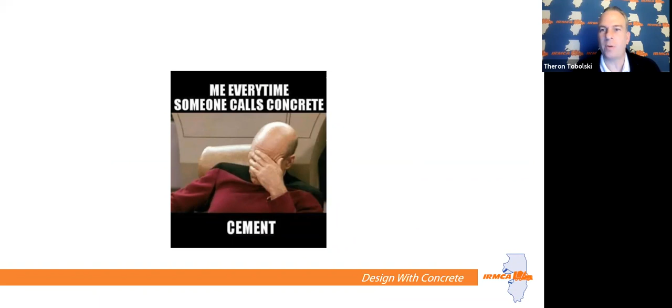So first things first, when we talk about concrete, if you're in the concrete industry, you kind of have to know the rules. How do you design concrete? How do you place concrete? What are the rules that the industry follows? We have ACI, the American Concrete Institute, ASTM, AASHTO, FHWA, and FAA. These agencies make the rules, standards, guidelines, and certifications for the industry so that concrete can be designed, produced, tested, and placed properly. As a concrete producer or engineer, you want to read them, learn them, preach them, and practice them. Those are the rules and guidelines on how we do concrete.

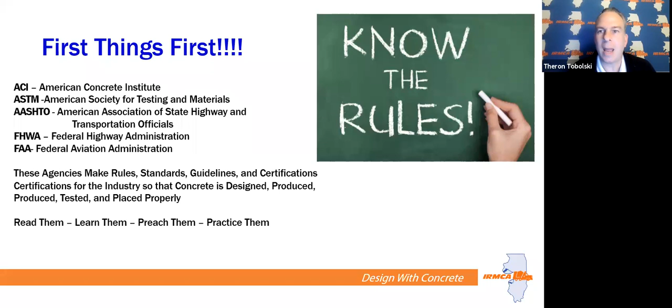Where do we supply it to? We have IDOT, municipal work, county work, Chicago Department of Transportation, the Tollway Authority, and airports. They take those industry standards, modify them, and then enforce their modified rules. They take what you typically do and edit it based on their knowledge or focuses, then ask the industry to follow their modified rules. But when you look at residential work, commercial work, industrial work, healthcare and schools, high-rise buildings, they basically follow those rules to a T. The specifiers specify ASTM, AASHTO, or ACI, and that's what you follow for those projects.

So what is concrete? Concrete is essentially a mixture of two ingredients, aggregate and paste. The paste is made up of all the cementitious materials such as Portland cement, fly ash, slag, Portland limestone cement, silica fume, and other materials. The paste binds the aggregate, forming what you end up with as concrete. The various components, as you'll learn today, can be adjusted in their weights and amounts in the mixes to make the concrete mixes act all different types of ways.

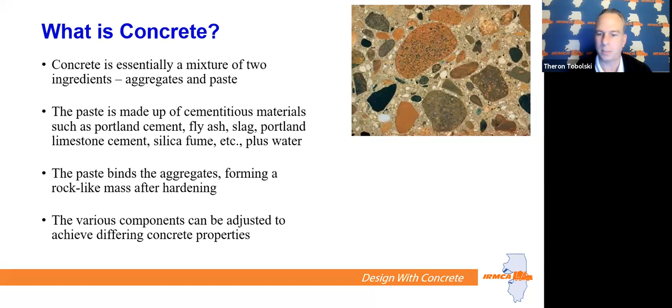A typical cubic yard of concrete contains 300 pounds of water, 564 pounds of cement, 1,200 pounds of sand, and 1,800 pounds of stone. That is what is in a typical cubic yard of concrete.

But concrete is actually a lot more complex. You can use type 1 or type 2 cement, or Portland limestone cement. You could add SCMs to your concrete mix, which is fly ash and slag, most commonly used in the Illinois market. There's air in there for freeze-thaw durability, and there's all kinds of admixtures you can add to your concrete mix that we'll cover in a bit. We're also going to have some amount of water in our concrete mix.

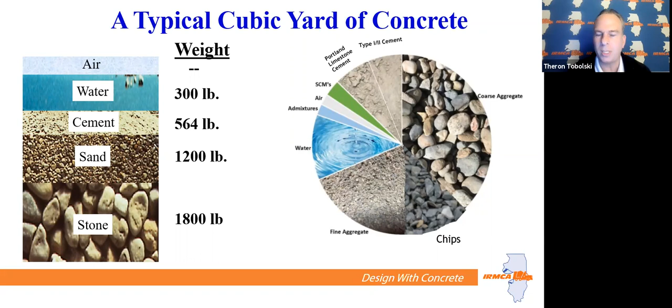A standard mix will have a fine aggregate like sand, and a coarse aggregate, 3/4 or 1 inch top size. But some mixes also have chips in them—you could have 3 aggregates. So depending on the concrete producer's complexity and how they like to make their mixes, it'll vary how all these different components are used in their concrete.

We're going to start with one of the basic ingredients, Portland cement. The governing rules for Portland cement would be ASTM C150 or AASHTO M85. What we mostly see in our market is type 1 normal use cement or type 2 moderate sulfate resistance. Most producers in their plants will carry those two types of cement, Portland type 1 or Portland type 2, or some are Portland type 1 type 2. That's the most common type of cement we see in our industry for concrete.

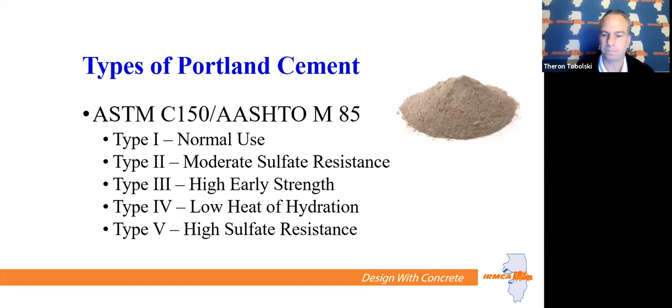But there are also various other types of cement. ASTM C595 blended hydraulic cements allow for slag, fly ash, Portland limestone cement, or ternary blended cements. So we take two different types of products and blend them together into a cementitious material that'll have a hydraulic reaction, and those are all covered under ASTM C595.

I'd like to talk a little bit about Portland limestone cement. This is kind of the new topic in the state of Illinois and the concrete industry in general. Concrete producers are looking to move to using Portland limestone cement that we just covered in the last slide. It has the same durability as the type 1, type 2 that we're currently using, and the same resilience. It has a 10% carbon footprint reduction, which is the other hot topic in the industry—carbon reduction of concrete.

So if you allow Portland limestone cement to be used on your project, you automatically get a 10% reduction in your carbon footprint. PLC gives specifiers, architects, engineers, producers, and designers a greener way to execute any structure, paving, or geotech project with virtually no modifications to a mix design or placing procedures. Again, it's very similar to the type 1, type 2 that you use and specify on a daily basis.

The Illinois Department of Transportation and the tollway both currently allow for Portland limestone cement in their specifications. If you go to www.greenercement.org, there's a whole host of information on Portland limestone cement.

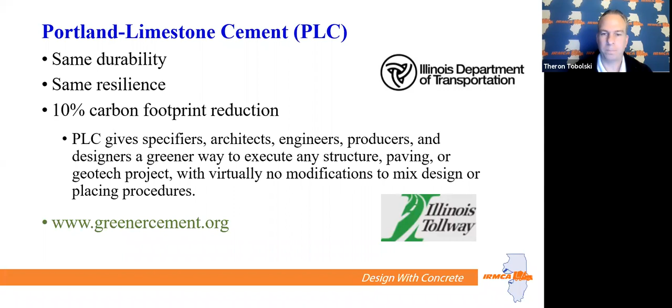How does Portland limestone cement differ from type 1, type 2? PLC is made by integrating regular clinker with up to 15% limestone, while the regular type 1, type 2 has 5% limestone. So the only major difference in Portland limestone cement versus the typical ASTM C150 type 1, type 2 cement is 10% more limestone added during the cement process.

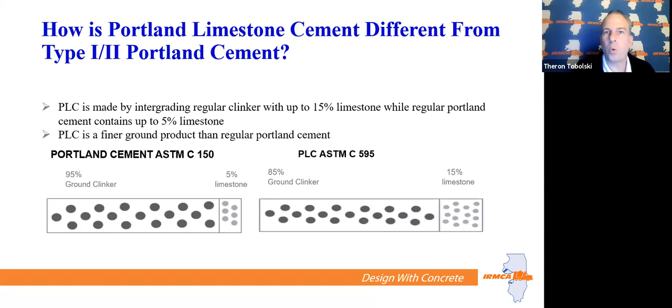This is just a quick diagram showing 95% ground clinker with 5% limestone versus 85% ground clinker with 15% limestone. As we covered earlier, this is kind of where the concrete industry is looking to go—to move towards Portland limestone cement, or at least to allow it on our projects.

Why are concrete producers still using type 1, type 2 cement instead of Portland limestone cement? There are three basic reasons why we haven't seen, at least in Illinois, that movement over to doing Portland limestone cement entirely: specifications, silo space, and availability.

So let's start with specifications. When we bid concrete projects, if the specifications do not allow for Portland limestone cement, we then cannot supply it on the concrete for those projects.

For a concrete producer, our cement is stored in a silo, which you see here on the slide. Concrete producers only have so many silos at their plant. So 95% of the concrete plants in Illinois cannot carry Portland type 1, type 2, and Portland limestone cement at their plants—they kind of have to pick one or the other.

So they're looking for the engineers who design work in Illinois to allow for Portland limestone cement as an option, so that they can start emptying those silos out with type 1, type 2 and moving to Portland limestone cement. And then it's kind of the chicken and the egg, which came first scenario. For cement companies, some of them can produce both type 1, type 2 and Portland limestone cement, some of them have to produce one or the other. So the concrete and cement industry need the specifications to be updated and changed to allow this movement to Portland limestone cement.

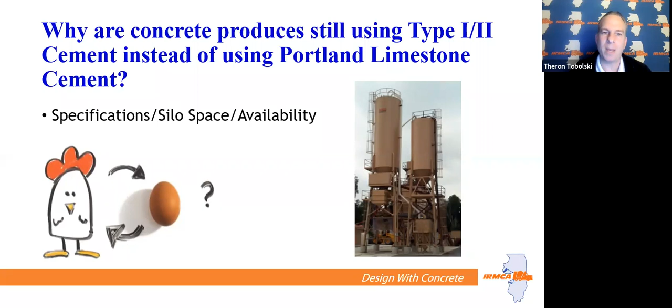Next topic we're going to cover is water cement ratio. This is one of the most important aspects in designing concrete and having durable concrete out in the world. The water cement ratio is the weight of the water in the concrete mix divided by the cementitious materials in the concrete mix. When we say cementitious materials, we mean the Portland limestone cement, the fly ash, the slag, or the type 1, type 2 cement. An example would be a mix that has 275 pounds of water divided by 564 pounds of cement, which would equal a 0.49 water cement ratio.

In a basic concrete mix, you need a minimum of 0.23 water cement ratio to get full hydration, and we'll cover what hydration is in a minute or two. Any excess water that you have in a concrete mix above the water cement ratio that mix was designed for will result in a weaker or more porous concrete. From a durability standpoint, every concrete mix is designed with a water cement ratio that allows that mix to meet the specification it was designed for and to be durable. Every gallon of water that you add to a concrete mix above the designed water cement ratio really dilutes the quality of concrete you're using on your project. It doesn't guarantee the concrete will be bad or fall apart, but it really increases the chances that it will every time you go above that water cement ratio.

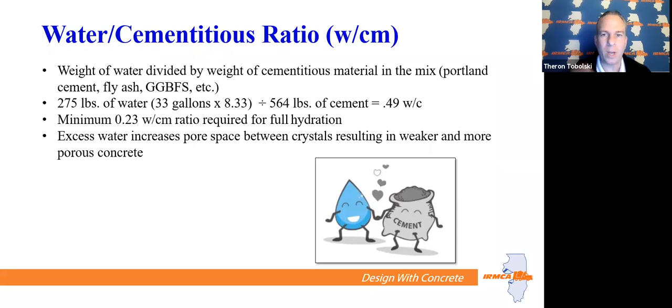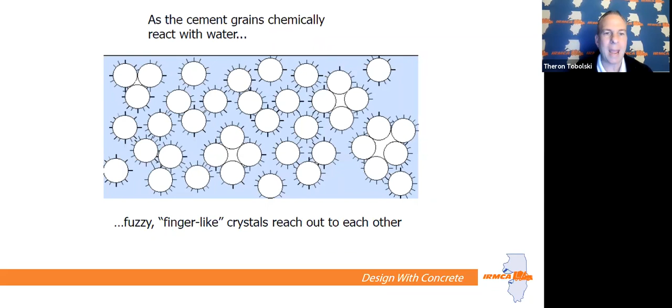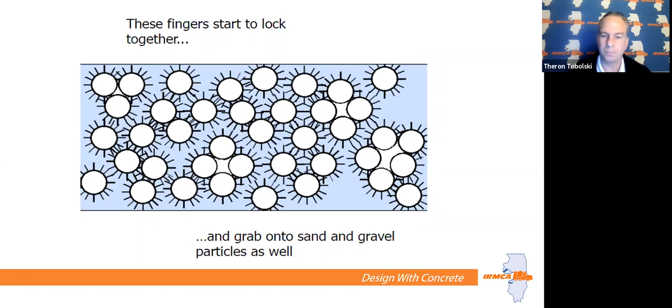We'll show you a little bit what hydration is. So we have our cement grains, these circles, and they're surrounded by water. As the cement grains chemically react with the water, fuzzy finger-like crystals reach out to each other. As you can see, that's starting to happen. These fingers start to interlock with other fingers of other cement grains, and they grab onto the sand and gravel particles that are in the concrete mix as well. Eventually, these crystals get so intertwined that the concrete stiffens, which we call set. And as the water and cement are used up, the crystals form a hard, dense structure, which we know as concrete. All the water that is not used during the hydration process ends up evaporating and leaving little channels inside the concrete mix.

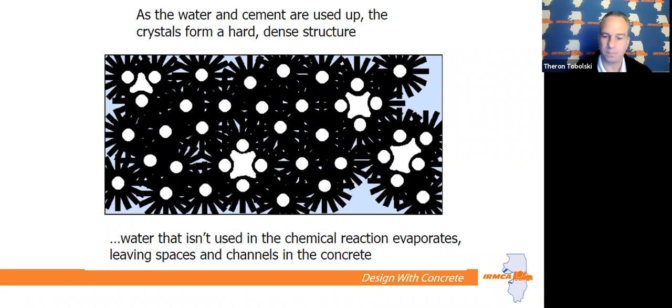Effects of water on compressive strength. We've talked about how the right amount of water is perfect for concrete, but if you add a little too much, that's bad for concrete. How bad is it? If we look at this graph, we're going to look at the air-entrained concrete in green. If we look at 0.4 water cement ratio and go up to the green mark, we see that concrete is about 4,800 PSI. That's a good concrete strength for exterior concrete.

As we add a little water to that mix and go above 0.40, we end up at 0.5. You can see the dramatic drop in strength for that concrete mix, we went from about 4,800 down to about 3,500 PSI. As we watch all the way to the end of the graph, as we get to a 0.7 water cement ratio, we're back down to under 2,000 PSI concrete. That concrete is not going to be freeze-thaw durable, it's going to fall apart and have all kinds of issues. So this is just a good visual to show you how you really need to maintain the water cement ratio that mix was designed for.

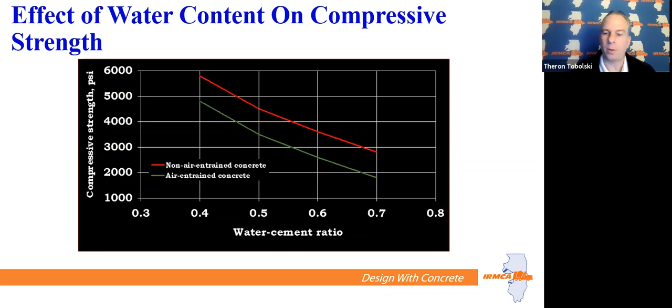These are some rules of thumb. Adding 1 gallon of water to 1 yard of concrete will increase the slump by 1 inch. It'll cut the compressive strength by 200 PSI, waste the effect of a quarter sack of cement, and increase the shrinkage potential by 10%. Think about that for a minute—1 gallon of water increases shrinkage potential by 10%. Now think about how many gallons of water can be added to a truck on site. There could be 30, 40, 50 gallons of water on some projects, so it really has a major effect.

It decreases the freeze-thaw resistance by 20% and decreases the resistance to de-icing salts. It increases cracking by 10%. Nobody wants a cracked concrete pavement—that happens, but we don't want it. Again, 1 gallon of water increases cracking by 10%. It also increases the air content by 1%. Every yard of concrete exposed to freezing and thawing has an air percentage range it needs to be in, typically 5 to 8%, to be freeze-thaw durable. So every time you add water to a yard of concrete, you increase the air, and when you increase the air, you actually decrease the strength, which then hurts the durability. So you've got a 2-for-1 whammy against your concrete when you're adding water.

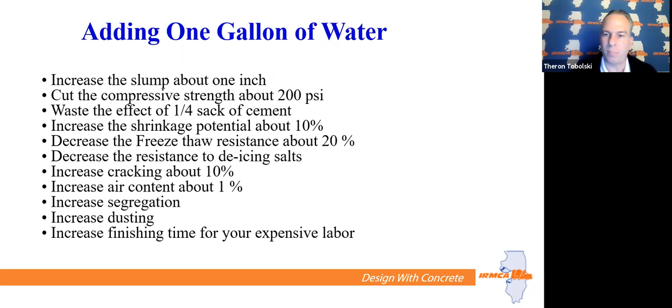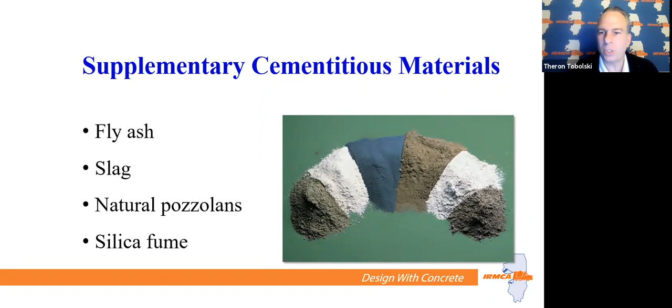So we're talking a little bit about supplementary cementitious materials. We talked about a concrete mix—a basic one just has cement, water, and aggregates. But now you can actually add some things to your concrete to make it work and perform better. We typically can add fly ash, slag, natural pozzolans, or silica fume. In heavy commercial, light industrial, driveways, and sidewalks in the state of Illinois, the most common are fly ash and slag, so that's what we're going to cover today.

As part of the industry rules of thumb on how you do concrete, ACI 301, the specification for structural concrete, gives you a chart on how much fly ash or slag you should put in your mix. For fly ash, you're allowed to go up to 25%. For slag, up to 50%. For silica fume, 10%. For a combination, 50%—and that's mostly what we're concerned about today. So if you're a specifier looking for a guideline on how much fly ash or slag to allow in your concrete mixes, this is a great rule of thumb to help you decide what you should or shouldn't allow.

So we're going to talk about fly ash for a minute. Fly ash is one of the most common supplementary cementitious materials we have. It's a byproduct from burning coal in power generating plants. The two main types we see in Illinois are Class C and Class F. Most producers, if they're carrying fly ash in their plants, are using Class C fly ash. The advantages: it increases your workability because it's a round particle—it rolls really well and helps with finishing and workability of concrete. It reduces permeability—we'll cover what permeability is in a couple minutes. It also improves sulfate resistance and improves ASR mitigation.

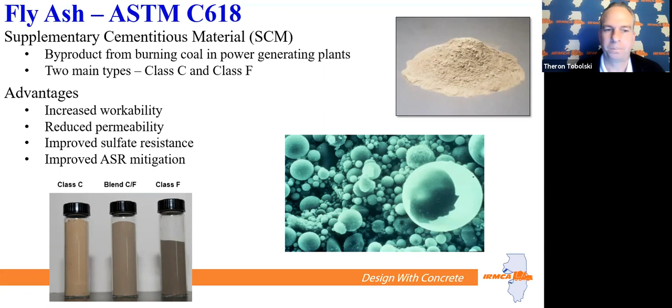Typical amounts of fly ash and slag: Fly ash, we typically see a Class C ash of 15 to 40% replacement. A Class F, we see 15 to 20%. And slag, we see a 30 to 80% replacement.

Caution should be used. If you're going to be using over 35% replacement for any concrete that is going to be in a freeze-thaw scenario, like an outside parking lot or driveway, you really need to be careful using those high replacements. They tend to take a little longer to set, and you could cause the contractor to have some finishing issues. So again, it's not that you can't use them, but you've got to make sure that the concrete producer, the concrete contractor, and the engineer are all on the same page, and that everyone understands how those concrete mixes with high replacement are going to act.

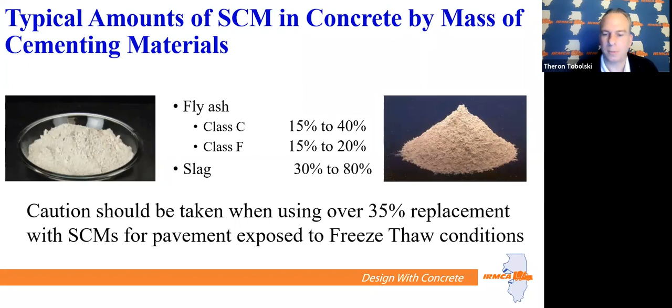Let's talk a little bit about slag. What is slag? It's another supplementary cementitious material, a byproduct from iron and steel making from a blast furnace. There are three types: grade 80, grade 100, and grade 120. The advantages are similar to fly ash: it increases workability, reduces permeability, improves sulfate resistance, and improves ASR mitigation.

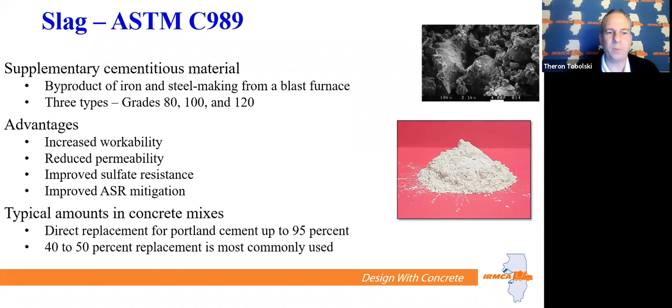Typical amounts in concrete mixes: we have seen up to 95%. Most people in our market for outside flat work are probably at 30% or less. 40 to 50% is most commonly used.

Slag or fly ash used in the mix also changes how the concrete acts, and I feel like this is a good chart to show you. Under 7 days, the gray is a straight cement mix, the blue is a 25% replacement with slag, and the greenish color is a 50% replacement of slag. In the 7-day range, the straight cement mix outperforms from a strength standpoint compared to the slag replacement. But when you get out to 28 days and even longer, the slag 25% and 50% replacement actually outperform the straight cement mixes.

So again, using slag and fly ash in concrete is actually really great and wonderful, and you just have to know how it's going to act. Those early strengths are going to be down, but the later strengths are going to be up.

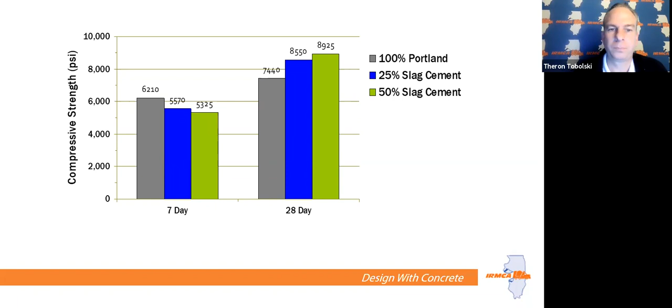We're going to cover permeability for a minute. What is permeability? We talked about fly ash and slag helping with permeability. It's the measure of how easy it is for water or other substances, such as chloride ions or sulfates, to enter the concrete. We really don't want those products getting into the concrete, because they corrode the steel or cause extra freezing and thawing issues. So reducing permeability is a good thing for concrete.

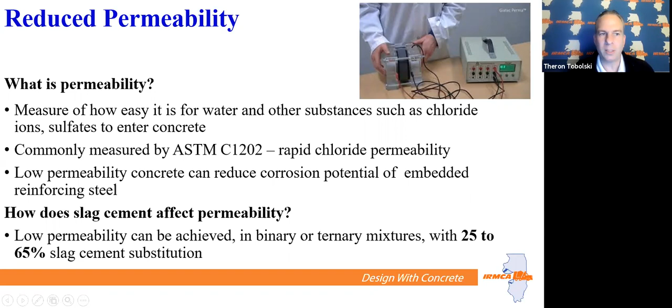We commonly measure that by ASTM C1202, the rapid chloride permeability test. Low permeability concrete can reduce corrosion potential for embedded reinforcing steel. How does slag cement affect permeability? Low permeability can be achieved in binary or ternary mixes with up to 25% to 65% slag cement substitution. So again, there are really great benefits to allowing slag and fly ash in your concrete mixes.

So the overall benefits of using fly ash and slag: you get higher overall strengths, you reduce environmental impacts of concrete because we're using recycled materials. We have lower early strength, though, and lower early strength is going to cause your construction schedules maybe to push back a little bit. So you've got to be aware of that.

We get longer set times. It's great for summer, but not recommended in the winter. When it's real hot outside, we really want some slow setting concrete compared to fast setting concrete.

So fly ash and slag are good for that. It also slows down the heat of hydration. We talked about when the cement hits water, we have that hydration process that starts so the concrete can set and become a hard concrete material. Well, we also give off heat, so the more cement you have in there, the more heat you're going to generate. So if you're pouring some mass foundations or something where they're 5-6 feet wide or thick, it's a great way to mitigate that heat by using slag or fly ash. It really brings down that temperature in the concrete.

It also reduces water demand. We talked about there being a certain water cement ratio, and the more water you add above that water cement ratio, the more harm you do to the concrete. So by using fly ash or slag, it reduces the amount of water you need to get this desired workability of that concrete mix. And we also talked about how they lower the permeability, so less salts and chemicals can enter the concrete to do harm.

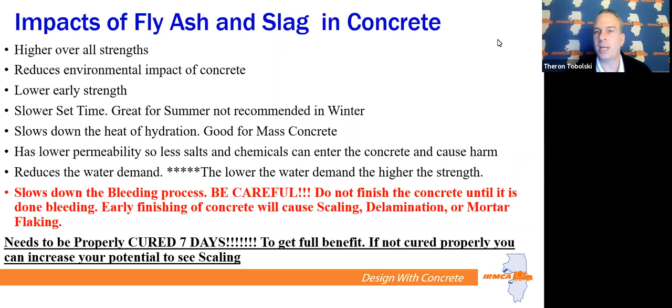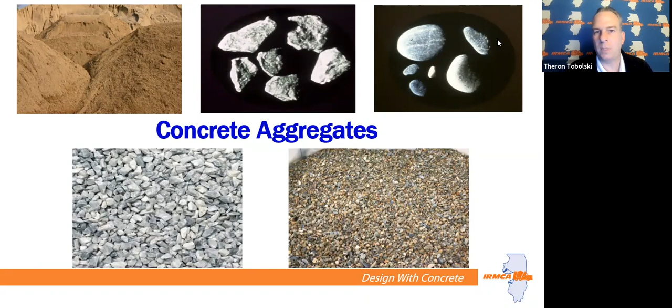The next part of the presentation we're going to talk about is concrete aggregates. We covered cementitious materials and water in a concrete mix. Now we're going to talk about aggregates a little bit. So in a typical concrete mix, you can use sand, limestone, or gravel as your top size aggregate, or you can use chips or pea gravel as a smaller aggregate in your mix, or combine chips and pea gravel and other aggregates to use multiple aggregates in your mixes.

How do we know that we've got the right type of aggregate and that it meets the specifications governing that sand or stone? The answer is we use a bunch of sieves to do a sieve analysis of that material. So in a concrete yard, truckloads dump a bunch of sand or a bunch of 3/4 inch stone, and we take a sample of that pile to see, is it good?

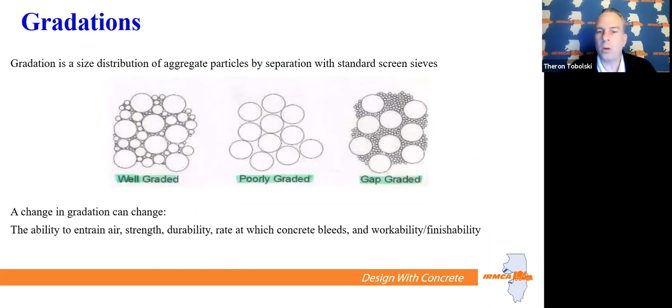Believe it or not, this kind of happens from maybe an accident in the production of an aggregate, and a sample was taken and brought to a concrete plant, or maybe the way the concrete producer is stockpiling his aggregates causes one of these scenarios to happen. But this is exactly why we sample our aggregates on a daily basis, test them, and make sure they're of the right quality. Because if you have a gap-graded or poorly graded material, you can affect the way air goes into the concrete, the strength, the durability, the rate at which the concrete bleeds, or the workability or finishability of that concrete.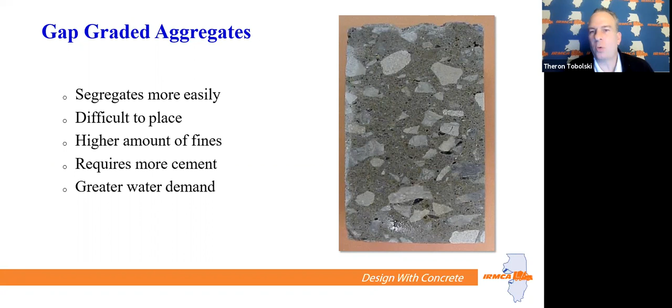Gap graded aggregates—as you can see here from this slice of concrete—have very large sizes and small sizes. This type of concrete would segregate more easily. It'd be difficult to place. It would have a high amount of fines. It would require more cement and have a greater water demand. So that's what happens when you have a gap graded aggregate in your concrete.

But when you have a well graded aggregate, you can actually see in this slice of concrete that all the different sizes are well represented. It's less prone to segregation, easier to place, has lower amounts of fines, and requires less cement and less water demand.

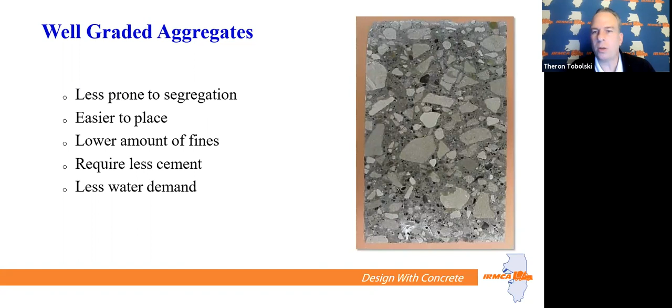Now that we covered aggregates, cementitious materials, and water, we're going to talk about admixtures. Admixtures are wonderful. An admixture can solve every type of problem that a concrete contractor can have for placing, consolidating—all the issues that contractors have on projects.

There is a chemical admixture that can fix it. So we have air entrainers, water reducers, super plasticizers, hydration stabilizers, waterproofing, corrosion inhibitors, shrinkage reducing admixtures, and color pigments. Most concrete producers have most of these different admixtures at their plants on a daily basis.

We talked about in the beginning that you've got to know the standards out there to create concrete. So ASTM C494/C260 is the industry rule governing the different types of chemical admixtures. There's type A all the way to type S. These different admixtures listed on this page are the most common types of categories that concrete producers use to make concrete on a daily basis.

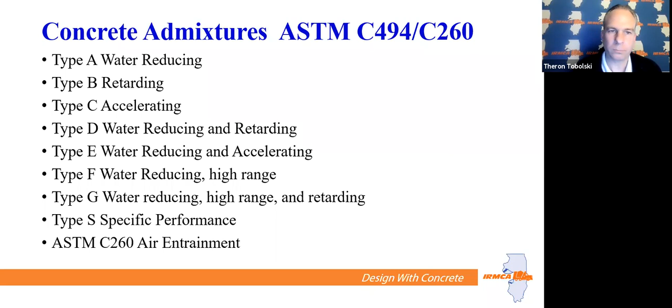We're going to look at these admixtures a little more in depth. The primary purpose of air entrainment is to create, stabilize, and entrain millions of tiny bubbles to improve concrete's freeze-thaw durability. So in any concrete that's going to be outside and susceptible to freezing and thawing, you have to put an air entraining chemical in there that creates all these little bubbles to make that concrete freeze-thaw durable.

It also improves workability, but every percentage of air you go up reduces the strength. It minimizes segregation, and it can be inexpensive. So again, it's a necessary product that you have to have in your concrete if it's going to be exposed to freezing and thawing.

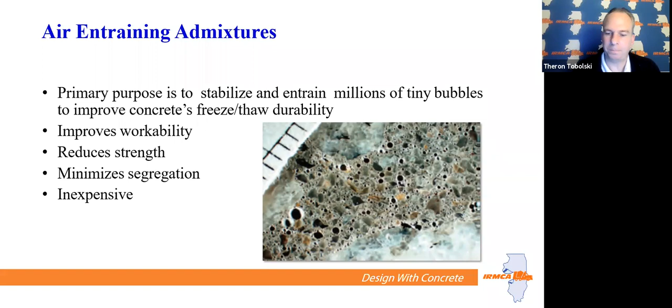What affects air? Cement content—an increase in content lowers air. So if you have 400 pounds of cement and you add some cement to your mix to improve the strength or durability, you might have to adjust the air content in your concrete.

An increase in alkalis raises air. So if you have a low alkali cement and you switch to a high alkali cement, that'll affect the amount of air in that mix design.

Fly ash has carbon content in it, and as carbon content fluctuates, the carbon absorbs air. So a high carbon fly ash would actually make you need to increase your air chemical in the concrete to get the same 5 or 6% that you want in your concrete mix.

When you use slag, increase in fineness in the slag may lower the air. If you use a mid-range water reducer, as dosages go up, less air is needed, so mid-ranges kind of help you entrain air in the mix. Some of the new high-range water reducers at low doses would have less air in there.

If you increase the sand in your concrete mix to help it finish more, you might have to change your air content. Air increases with the water cement ratio, so every time you add a gallon of water and increase the slump, you also increase the air.

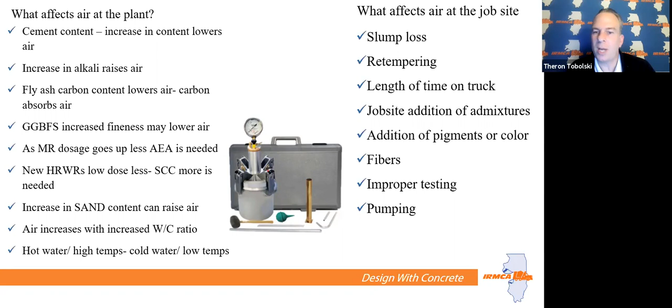There are 3 different types of water reducing admixtures that concrete producers typically carry: low range, mid range, and high range. A low range has 5 to 10% water reduction, a mid range has 6 to 12%, and a high range has 12 to 40%.

In this picture, first you have a 0.4 water cement ratio concrete with 695 pounds of cement. When they did a slump test on it, the concrete didn't even fall - there's really no slump, it's a 0 or half inch slump. But when we took that same mix and added a water reducer, we got a 3-inch slump - that concrete became a little more workable and easy to use.

If we took that same mix and added a super plasticizer, we actually got a 7.5-inch slump, so you can see that concrete fell pretty low - it's a real flowing, workable concrete mix. This shows you the power of using admixtures in concrete and how they can change the workability or quality of the concrete you're using.

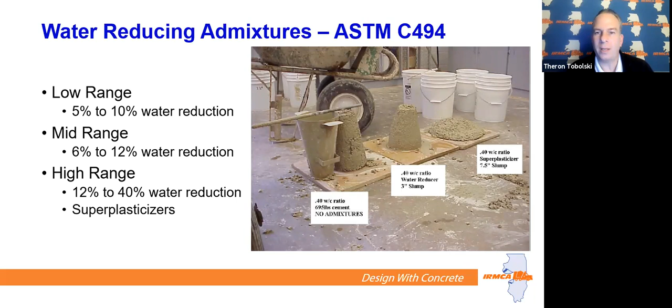Another way to explain water reducing admixtures: if we took a mix with 500 pounds of cement and 300 pounds of water, we would end up with like a 5-inch slump. If we took that same mix and added a water reducer, we would end up with a 7-inch slump, and we'd still be at that same 3,500 PSI concrete mix. So all we did is add a water reducer and we gained 2 inches in slump.

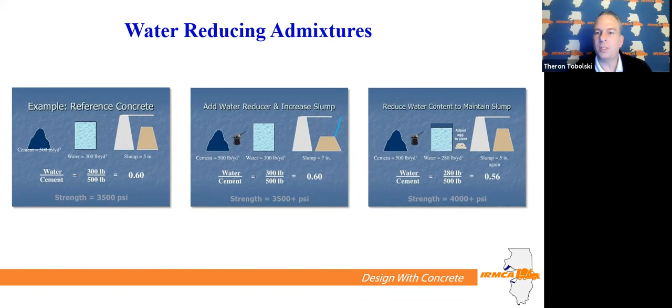We also could add that water reducer to that same mix and drop the water a little bit, so we would stay at that same 5-inch slump, but we'd actually be bringing the water cement ratio from 0.6 to 0.56, and we would create a 4,000 PSI mix - 500 PSI better than our previous two mixes. So this shows you the different ways water reducers can be used.

I think the easiest way to explain the difference of the two is in a basic old school retarder. If you wanted to go from 60 minutes to 90 minutes, you would add the chemical retarder and it would hold the concrete to give you more time to finish it. But when that retarder wore off, the concrete would kind of flash set and take off and harden.

The way hydration stabilizers work is if you want to go from 60 to 90 minutes to finish the concrete, you put the hydration stabilizer chemical in there, and then at 90 minutes only a little bit of it wears off. At 100 minutes, a little more wears off. At 110 minutes, a little more wears off. So it actually gives the finishers more time to finish the concrete. It's more finishing friendly. There's no kind of flash set of the concrete, so they're very finisher friendly. It's great new technology that the concrete industry is using.

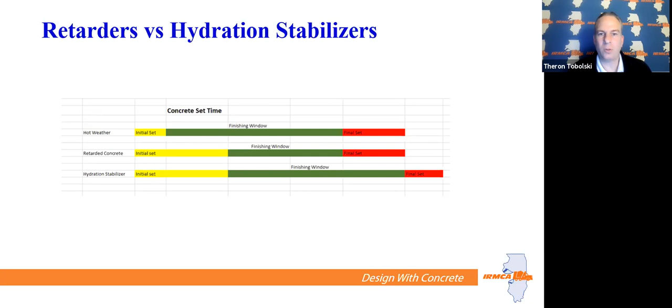We talk about accelerators, right? We showed you how you could put a retarder in the concrete to slow it down, but you can also put an accelerator in the concrete to speed it up. Maybe you want higher release strength to open up a concrete pavement sooner rather than later.

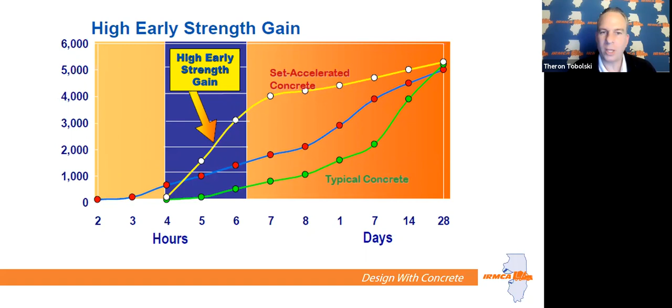Benefits of chemical admixtures: you can reduce the amount of water needed in concrete, increase workability without adding water, retard or accelerate the set time, reduce slump, modify the rate or capacity of bleeding, decrease shrinkage, reduce plastic or drying shrinkage, reduce corrosion, produce colored concrete, or produce cellular concrete. So there are a lot of benefits to using admixtures in your concrete.

How does cold weather affect concrete? If we had a 70-degree concrete, this concrete mix would approximately set in 6 hours. And for every degree in concrete temperature that the concrete decreases, the set time changes. When we go to 60 degrees, we go to 8 hours. When you have 50 degrees, we go to 11 hours.

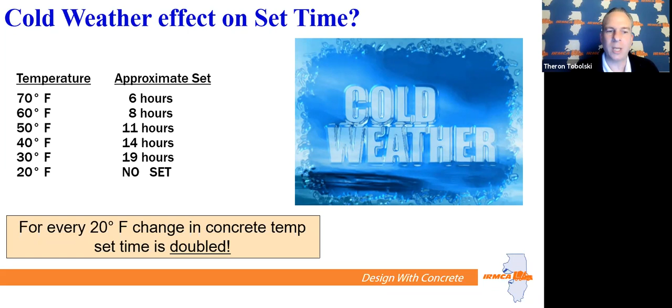At 20 degrees, we're not going to get any set. So it just goes to show you why keeping concrete temperatures up is important, and that in cold weather, practices need to be taken to keep the concrete temperatures up, and also protect the concrete when it's placed, so that it keeps that temperature and sets and gains strength. For every 20 degrees change in concrete temperature, your set time doubles. That's the basic rule of thumb.

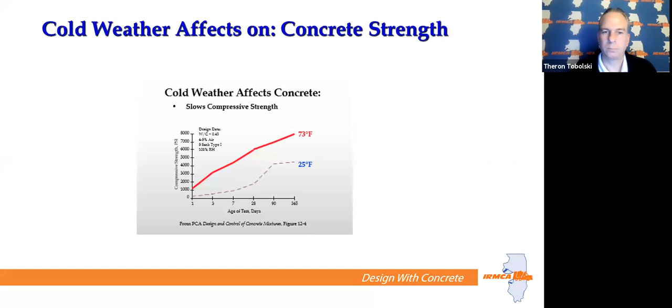How does hot weather affect set times? We talked about cold weather, let's look at hot weather. If we had our typical 70-degree concrete, that mix would set in 6 hours. But when we get to 80 degrees, we go to 4 hours, 90 degrees is 3 hours, and 100 degrees is 2 hours.

The big issue you see with that is how are concrete finishers going to finish the concrete if it's only setting in 2 hours? They might throw water on it, which could cause all types of issues. So this is just a good chart to show you how concrete temperature changes can affect the set time of the concrete.

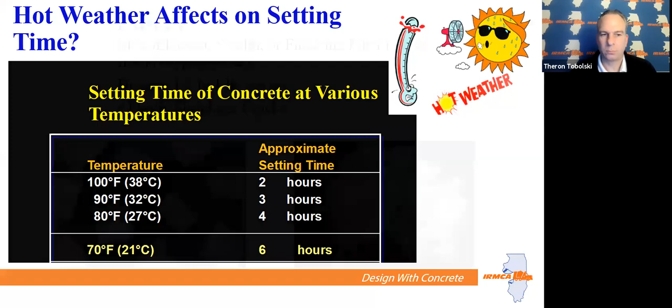Let's talk a little bit about fibers. The first type of fiber is what we call monofilament, stealth, or finishing fiber. It's made from polypropylene, and the dosage rate in concrete is typically 0.5 to 1 pound per cubic yard.

It's basically for plastic shrinkage cracks. When concrete bleeds, there's a little bit of water ponding on the surface, and that bleed water evaporates. Sometimes if that happens too quickly, we get all these little plastic shrinkage cracks on the surface of the concrete and it just looks bad. But if you put in 0.5 to 1 pound per cubic yard of this type of fiber, it lays across that surface and doesn't allow that plastic shrinkage cracking to happen. And it's very inexpensive.

The next type of fiber is what we call fibrillated fiber. There's 3/4 to 3 pounds per cubic yard is the standard range for this fiber. 1 to 1.5 is typically what we see people use.

It will replace welded wire fabric in driveways or patios, but it has no post-crack control. Everybody in this industry defaults to welded wire mesh, but it really doesn't do much for you. Welded wire mesh does not stop cracks from happening. The only thing it does is once a crack happens, it holds it together. But the problem is if a crack starts at the top of the pavement and travels down to the bottom, it's going to keep opening up until it actually hits the welded wire fabric at the bottom. So that crack's going to open up and get wide.

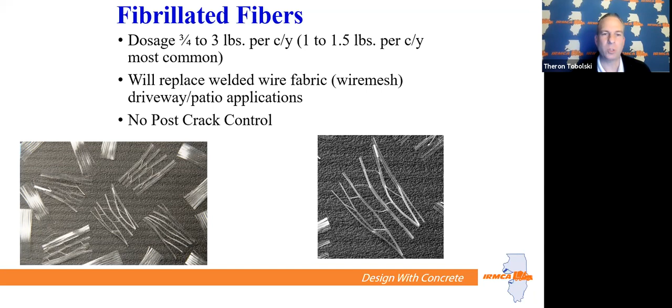With fibers, they have the same responsibility - they don't stop cracks from happening, but they hold them together once they happen. The difference is fibers are distributed from the top to the bottom of the pavement. So when a crack happens at the top, it immediately hits a fiber and can't open up anymore. It's not as unsightly, doesn't open up as much, and it's a much better concrete pavement with fibers compared to welded wire mesh.

Then we get into what we call macro fibers. We typically see 3 to 12 pounds per cubic yard is the range you can specify for these fibers. 3.5 to 4 is typically what we see in our concrete pavements. It replaces wire mesh, steel fibers, light rebar, and other secondary reinforcing slab on grade, and composite steel for floor decks. It provides post-crack control performance. This is where you start to need an engineer involved. Most fiber companies have an engineer on staff who can help you look at your pavement, see what you're trying to do, and talk to you about different dosage rates of fibers and what you can do with your concrete pavements.

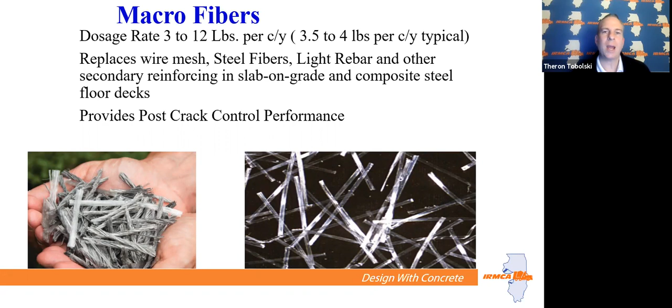Last but not least is steel fibers. They increase structural strength, fatigue and impact resistance. They give some ductility to the concrete. They stop micro cracks and relieve internal strain. We typically see 40 to 70 pounds per cubic yard. We see a lot of interior floors use either macro fibers or steel fibers to take those joints from like 50 feet to 150 feet. That's another trend we see in our industry.

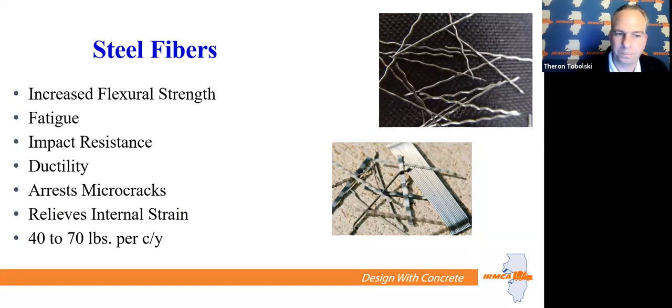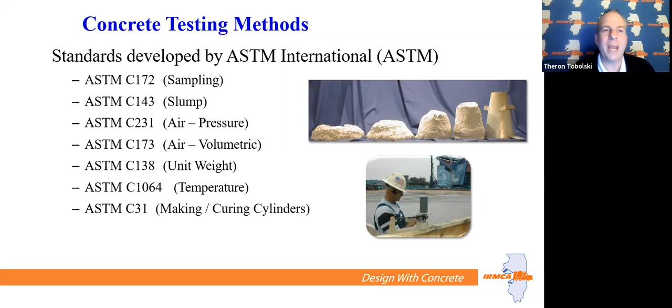Concrete testing - so we talked about our basic concrete mixes and all the materials that are in there. So we created our concrete mix. How do we even test it to know that the concrete mix is good? Here's the different ASTM standard tests that you use to test concrete.

Sampling is important. ASTM C172 is used to tell you how to sample fresh concrete. You need greater than 1 cubic foot of concrete to perform your tests, less than 15 minutes between the first and last portion of your sample. The sample should not be taken from the first or last portion of the concrete truck - you want to sample from the middle of the truck, not the very first or last part of that concrete mix. This shows you how you should sample concrete to then perform your test.

The next test is the test for slump. Here's a whole bunch of different pictures of slump tests being performed.

You fill your slump cone in 3 lifts, rod it 25 times each, lift the cone in 5 plus or minus 2 seconds, and measure to the original center. This is going to tell you a slump number.

Like a 2-inch slump, a 3-inch slump, a 4-inch slump, a 5-inch slump, and that basically tells you how workable your concrete mix is going to be. When you design a concrete mix, you design a water cement ratio and want an intended slump that the concrete should be poured at. This test shows you what slump your concrete is.

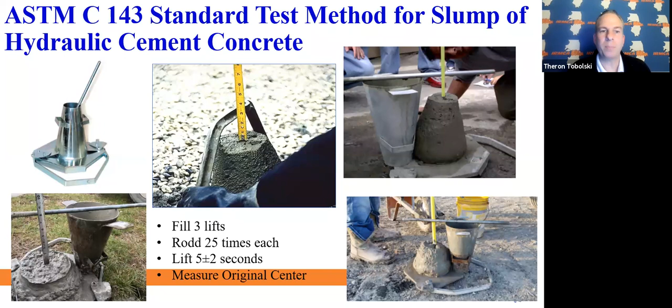There's a specification for temperature. Minimum 3 inches into the concrete you stick your thermometer. You have to close the void around it, because when you stick it in there's going to be a little void around the part that goes in. You push it back around the thermometer, and hold it in for a minimum of 2 minutes but a maximum of 5.

Most importantly, you read the temperature while the thermometer is still in the concrete. You don't pull it out and look at it, because the wind or ambient air is going to change the temperature. So you want to take your reading while the thermometer is in the concrete.

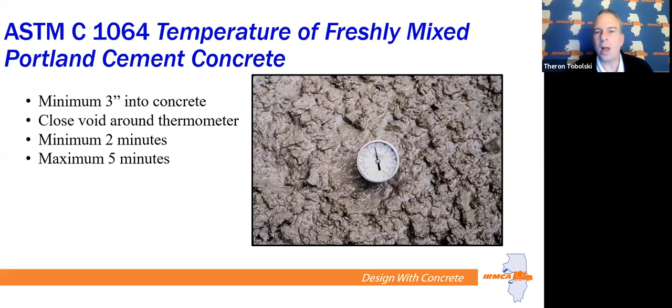We do have an ASTM standard for unit weight, yield, and air content. We basically take a bucket and put concrete in there. There's a whole standard for that, and it helps us understand, did our concrete yield right?

A concrete mix is designed to cover a certain amount of area. Sometimes someone might call and say, I got a shortage, I ordered 5 yards of concrete, poured it out, and I'm still 2 yards short. What happened, did you not give me enough concrete? This yield test is what tells you whether you're actually getting the cubic yard of concrete you paid for.

Did the concrete plant underbatch something, underweigh something, make an honest mistake? Did a bunch of concrete get stuck in the truck and not come out? This test is what's used on site to see if that truck is giving the right amount of concrete that should be in that truck.

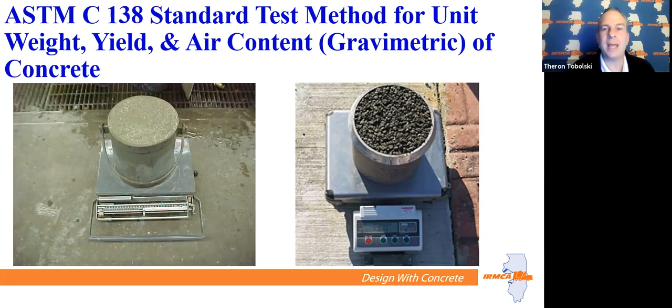You fill the pot in 3 layers, rod it 25 times, and tap each layer 10 to 15 times. Then you strike it off, put the lid on, put some water through the petcocks, close the petcocks, pump it up, and get your air reading.

We also make cylinders in the field to determine whether the concrete meets the strength we required, that we specified for that concrete.

So we use 4x8 cylinders. You fill them in 2 layers, rod each layer 25 times, tap each layer 10 to 15 times. For a 6x12, you fill it in 3 layers, rod 25 times for each layer, and tap each layer 10 to 15 times. This is the method used to cast cylinders on a project or in a yard, and then you break them at a certain age to determine if the concrete met the required strength.

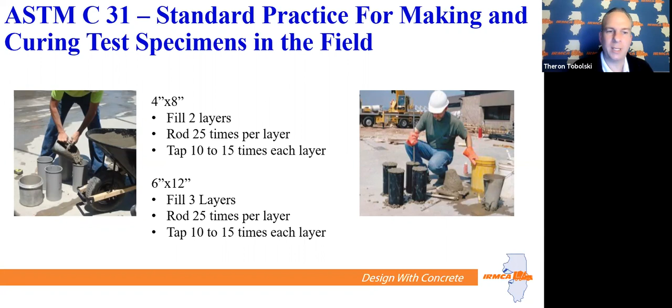Part of that standard is how you actually store the cylinders. Let's talk about a concrete project job site. So we cast our cylinders, and they can only sit on the project for up to 48 hours.

During that 48 hours they must be kept at 60 to 80 degrees. That rarely happens, but it's one of the leading causes of failed cylinder breaks from a job site. So it's very important, if you're an engineer specifying concrete, that these rules are followed.

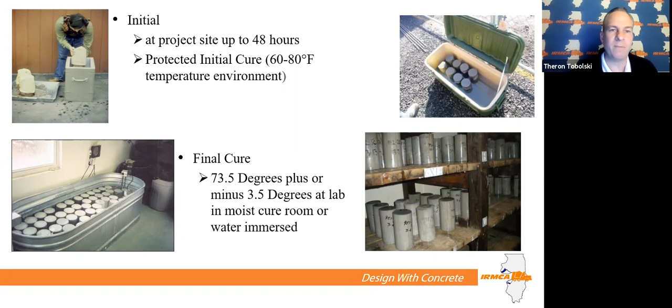After we've picked up the cylinders from the job site, we take them to the concrete plant or lab, where they have to be stored at 73.5 plus or minus 3.5 degrees in a moist cure room until they're ready to be broken. It's very important that we know and follow these standards when making cylinders and then breaking them for test data.

I was checking my time.

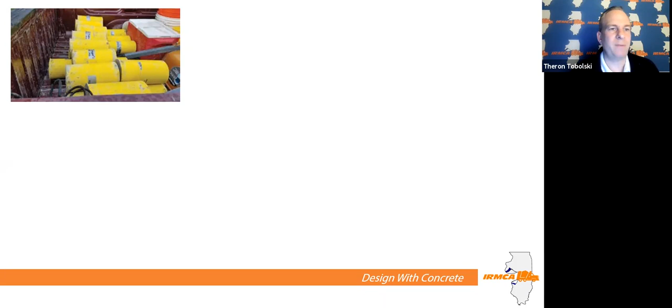Here we're going to look at a different couple scenarios and see if they're doing it right or wrong. So here we see a bunch of cylinders in the back of a truck, and we're wondering, have they picked them up at a job and now they're going to take them to their lab? Are they doing it right?

The answer is no. Look at this gentleman, he saw this and he wants to throw up. You cannot just put cylinders in the back of a truck and then drive them around. As you hit bumps or you stop too fast, those cylinders will slide back and forth, and they can actually cause micro cracks. So then when you go to break them, you'll get false low readings, and that causes all kind of problems on a job site. So again, if you're going to put them in the back of the truck, they need to be put in storage containers that will not allow them to move around.

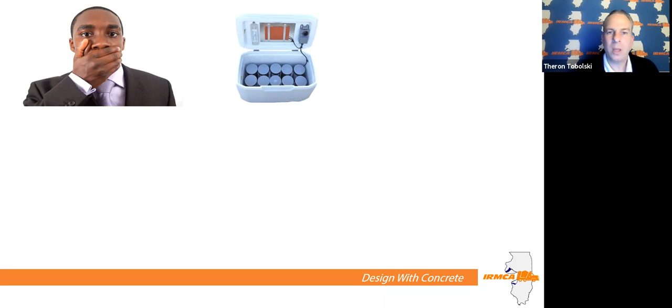Here we got a curing box that actually has a temperature reading. It's got a thermometer, and we can keep it between 60 to 80 degrees. Is this right? Yes, that's the right way to actually store cylinders on a project. They need to be temperature controlled to be kept between 60 and 80 degrees.

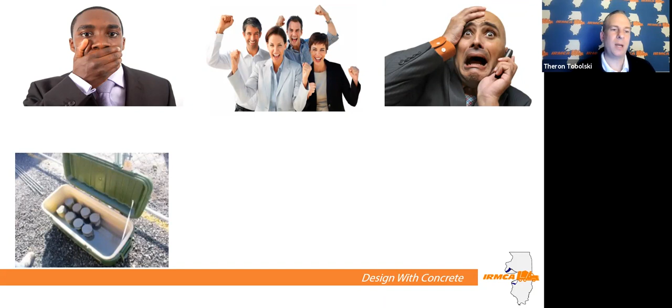Here we see a cooler. We've got a bunch of cylinders in there. There's some water in the cooler. Is this a good way to store cylinders on site? Absolutely. If there's one change in the concrete industry, if you're an engineer, part of your pre-construction meetings, there should be those type of curing boxes on your projects to store cylinders.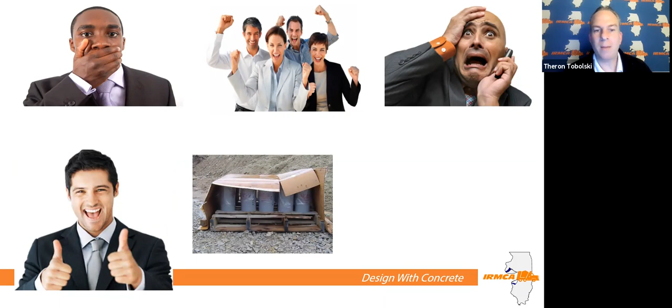Here we see a good attempt, right? We've got cylinders, we've got plastic bags over them. They've got some cardboard over them. They've took some extra time and care. Is this right? Kind of yes and no, right? They've actually covered the cylinders with some plastic. They got some cardboard to keep the sun out, but unless it's going to be 60 to 80 degrees for the 2 days that they're out on site, they need to put them in a curing box to make sure that they're the right temperature.

Here we see some cylinders sitting out in the sun. Is this the right way to store cylinders? Absolutely not. This guy pulled his hair out looking at it. They had caps with their cylinders and they didn't even bother to put them on there. It is very important that you cover your cylinders to keep the moisture in them.

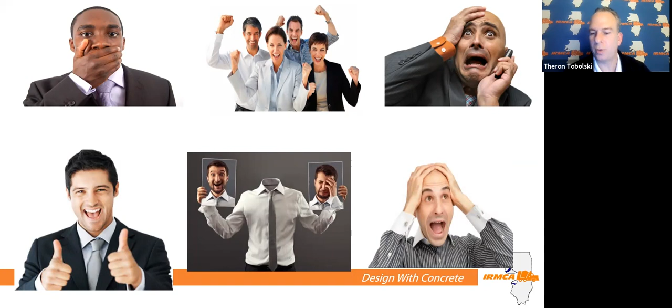What causes low cylinder breaks on jobs? Cylinders not made properly. Cylinders not stored properly, right? We talked about first 48 hours, 60 to 80 degrees. Cylinders are moved around before they're set. Sometimes we see people cast cylinders, they come back 4 hours later and then move them. But it's right in that kind of phase where the concrete's starting to set in that cylinder and they actually cause cracks by moving them. And then the cylinders break bad.

Cylinders left out in the sun. I don't think a lot of people are aware, if you leave cylinders out on a 90-degree day in the sun, you actually cook the cylinders and then they stop gaining strength. They'll never gain any more strength and you're going to get false bad readings on those concrete cylinders.

Cylinders are not stored on ground level. If you make them and you don't store them on ground level, they become very slanted. And when you put them in the cylinder machine, they're going to get a false bad break because it's not perfectly level on the face of the cylinder.

Cylinders in the field too long, they can only stay 48 hours, right? We see sometimes people make cylinders on Friday and don't pick them up till Tuesday. That's way too long. Sometimes it's a concrete producer's fault, right? Maybe you shipped the wrong mix.

Addition of water, right? We talked about water cement ratio. The more water you add, you break that water cement ratio, you're going to cause low breaks. High air, right? The concrete's designed to be between 5 and 8%. If you have 10, 11% air in your concrete, your strength's going to go way down. So you'd get bad cylinder breaks. You want to review the batch sheet, see if the problem was something that happened at the plant. These are all different reasons why concrete cylinders can break low.

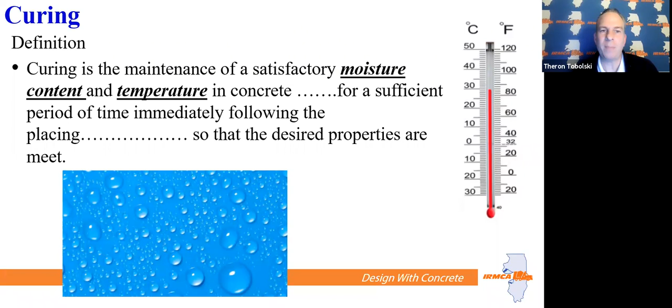We saw a couple different slides that showed how hot weather and cold weather can negatively affect concrete. So during the curing period, which is the first couple of days, mostly 7 days, you got to make sure that you're keeping moisture and temperature in the concrete.

Why is curing important? It minimizes or eliminates cracking. It improves the strength greatly. It creates a water tightness in the concrete and increases abrasion resistance. It improves durability, resistance to freezing and thawing, and resistance to deicer salts.

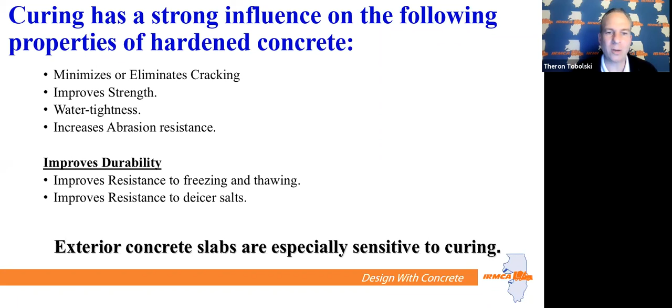Exterior slabs — it is very crucial to make sure that you have some curing in place for any concrete that is going to be exposed to freezing and thawing. It's really crucial that if you're an engineer and you're going with your contractor talking about how he's going to handle the concrete, a curing method should be discussed and looked at.

Effects on strength: if you see the brown line, a standard no-cure could give you a 4,000 PSI mix. But if you take that same mix and cure it with a moist cure for 365 days, you went from 4,000 to an 8,000 PSI mix. So having the proper curing methods can really improve the strength and durability of your concrete mixes.

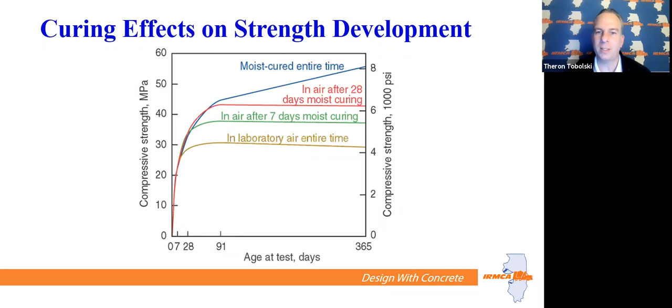Here's an example of curing that's poor. They sprayed the white pigment on it, but you can see all the gray through it. It's really a bad job of curing.

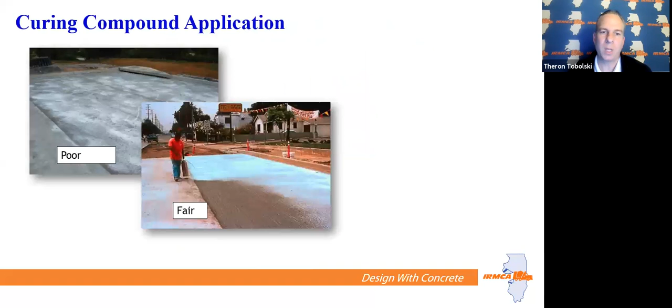Here we see a much better job. They're putting it on a little thicker, really covering that concrete, and this is actually how your concrete should look when you cure it. A white pigment is good to specify because you can actually see the rate at which they're applying it, and that's the goal, to lock that moisture in there. So you really need good coverage.

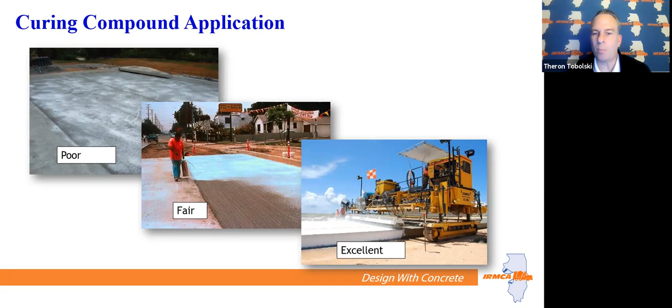Wrapping it up, a couple new trends in the concrete industry. Our industry is moving to e-ticketing, so if you're an engineer, it might be good to put some kind of specification in to allow e-ticketing. IDOT and Tollway are working on that now, and we've also had some successful projects with e-ticketing.

In summer, we've got to cool our concrete. We're seeing a movement to liquid nitrogen, so concrete producers are actually installing liquid nitrogen systems on their plant to cool the materials as they come down the belts.

We're also seeing a movement to low GWP or reduced CO2 concrete specifications for parking lots and interior floors. This is a big trend in our industry. IRMCA is working on a specification for the engineering community if you're interested in specifying these types of concrete for your concrete parking lots or interior floors.

As we discussed earlier, there is a real want and a movement towards Portland limestone cement instead of type 1, type 2. We covered that a little bit earlier, but that's a new trend we're kind of seeing at least in the United States.

Concrete parking lots — we see a lot of industrial buildings going to concrete parking lots in our market. It's a very favorable trend based on maintenance costs and durability. We're just seeing a big movement for especially industrial parking lots to be concrete.

IDOT — our industry just worked with IDOT. They created a special provision for a cement slurry for FDR, full depth reclamation. Currently, you might see lime or dry powder cement, but now we can deliver a cement slurry in a ready mix truck, which is a great new concept. So we look forward to talking to the engineering community about specifying cement slurry for those types of projects.

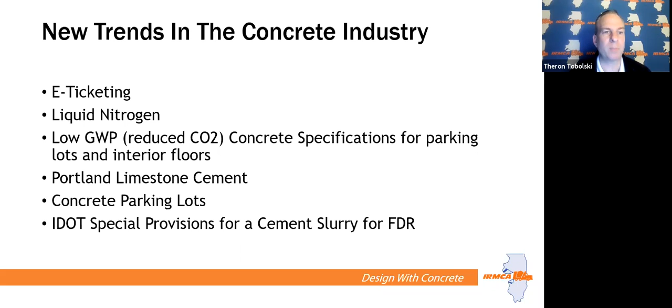Here's an example of some of the benefits of using liquid nitrogen. It's one of those new technologies we're seeing emerge. It's safer, convenient, easy to use, it goes right on the belt, and we can cool concrete in excess of 40-degree deltas, which is a big deal when you have hot weather or mass concrete. Liquid nitrogen replaces chillers, cooling tubes, ice machines, wet belts, and injected methods. So a great new technology that we're seeing.

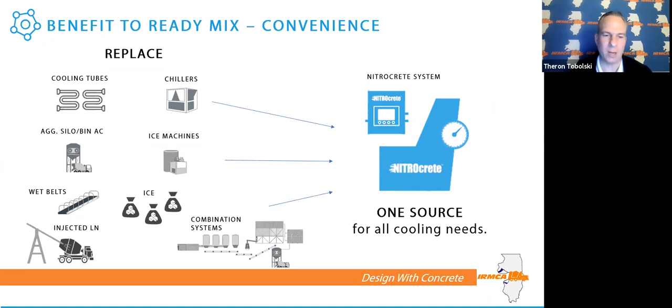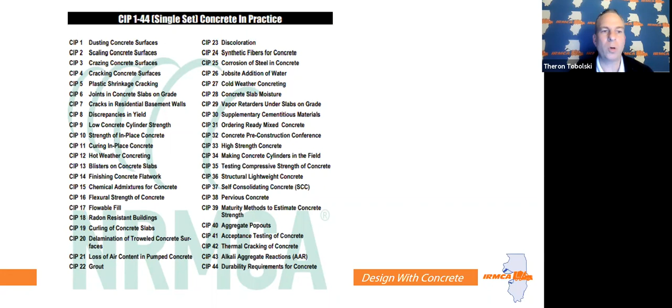One last thing, there's what we call Concrete in Practice, CIPs. They're produced by the National Ready Mixed Concrete Association, and they have great documents on all these different topics in the concrete industry. If you're an engineer and see any topics you're interested in, shoot me an email and I'll send you over the CIP. It's a great way to get yourself a little more knowledge on all these different concepts in the concrete industry.